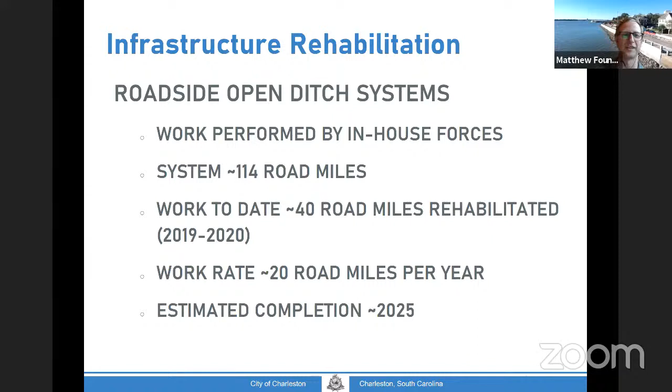The closed systems is sort of our... Mr. Chairman. Keith. Yes, sir, Mr. Councilman Shahid.

I just wanted to comment about what Matt's last comment was. We've been going around through the neighborhoods, and it's created a bit of a stir, frankly, Matt, and I may be calling on you for some remedial work we need to be doing with some of these neighborhoods. But I'm glad that we're doing this work, it really is important. But I think we need some constituent outreach, a bit more detail. I'll get back with you after the meeting and talk about it more. Sure, no, I'm happy to.

Generally, each neighborhood has on the order of 1 or 2 residents out of any 50 to 100 who are kind of unhappy because their particular property doesn't flood and they see the damage to the front ditch system until the grass revegetates. There is some frustration, but I think it's a really good place to be when you feel like your city is doing too much drainage maintenance rather than not enough, which is our typical complaint.

Yes, so you're right, it is a challenge, and it does look rough when you freshly trench ditches for the first 6 months or so, until the grass revegetates through the next growing season. I think we're a little less invasive than DOT tends to be, but it's still a pretty significant change when you leave for work in the morning and come home in the evening and see the difference. But we're certainly happy to reach out and talk to any residents about it.

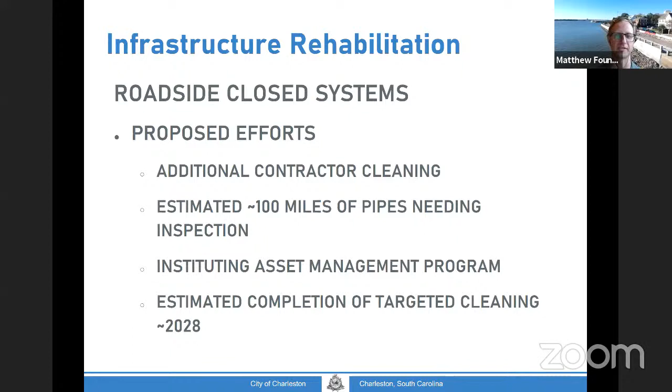We worked with the budget ad hoc committee last year to reallocate some positions within the department to create that inspection and asset manager inspection position. That position is getting started now, going through and trying to allocate priorities for pipe cleaning. We estimate getting through our targeted pipe cleaning work by 2028. So that's not the entire system this time, it's really targeting the major blockage areas within the peninsula and within the newer subdivisions again.

That really is just getting started in large part this year. We've done some selective cleaning over the last couple of years, especially on the east side, but this will be our first year with a major investment into that type of cleaning.

The other, kind of the third tripod of our ditch and pipe conveyance system, are the rear and side yard systems. These are hand cleaned generally, the ditches that run along the side of the home or behind the homes in much of West Ashley or James Island especially. These are, again, in-house forces, typically working with weed eaters, pole saws, and pitchforks, trying to hand clean these systems. We completed the hand clean level of rehabilitation over the 2019 to 2020 years for every one of these systems that we maintain in the city.

Some of the systems still don't work as well as we'd like because there's only so much you can realistically do with a shovel and pitchfork with any kind of realistic productivity. So we worked to obtain a walking excavator, a smaller, more flexible piece of equipment that can get into some of these ditches. That'll come in hopefully April to May this year, and be able to clean out some of the areas where we're still having challenges.

But it's much better than it used to be. We've rehabilitated all these, and we're currently cutting all of them once per year, doing a heavy vegetative cutback once per year. We're looking to get to, with the walking excavator over the next couple of years, being able to get every ditch maintained twice per year, so two heavy vegetative cutbacks through the growing seasons basically.

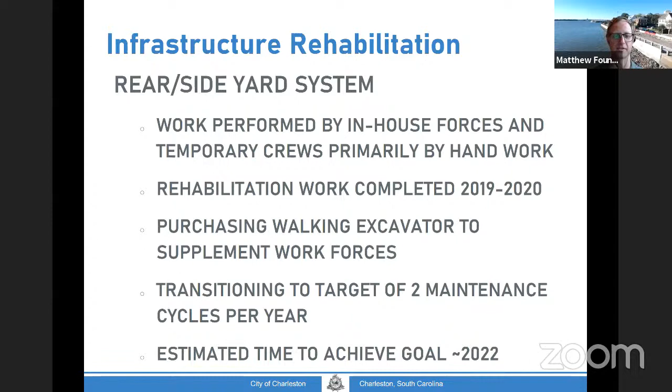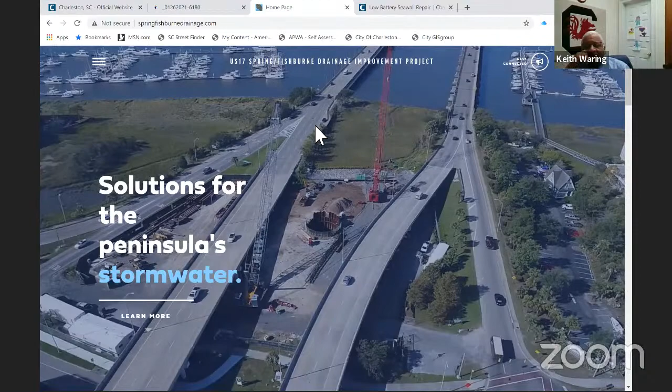Hey Matt, can you go back to that last shot please? Which one? The one that had all the rebar. Yeah, let's see, one second. You're just trying to test my Zoom capabilities now. Yeah, I am stretching you a little bit here. If you don't mind, can you just go back to this a little bit slower?

The parallel construction looks like it's going on - is this one just the... So this is what we call the outfall section. This is where we're digging out to put the eventual box culvert. There are 3 ten-foot by twelve-foot wide box culverts that will come in here and act as pipes to convey the water out into the river. This platform next to it is actually a temporary trestle built in the marsh for the cranes to operate on to do the work. It's about 1 million pounds of steel sitting in the river to do the work to install the outfall here.

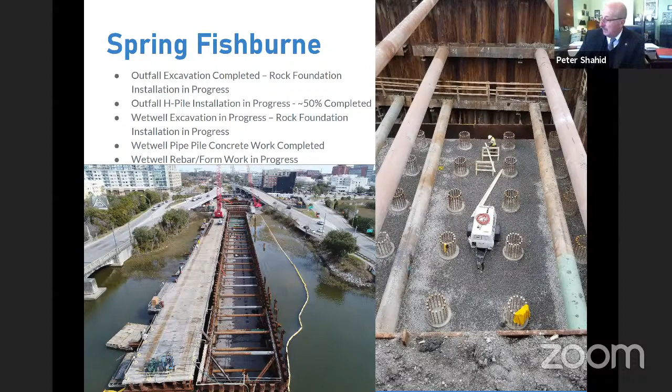I was just trying to get some more of the minute details of that, Matt. I think this is going to have such a huge impact on the peninsula once we complete even just this particular phase of the work. And then it looks like something out of the future to some degree when we get to full completion with the full project completed with full phase 5. So thanks for spending some time on that with us and explaining that in more detail. That's really quite interesting work we're doing here. Yeah, absolutely, and I'm going to show you briefly the website because I agree.

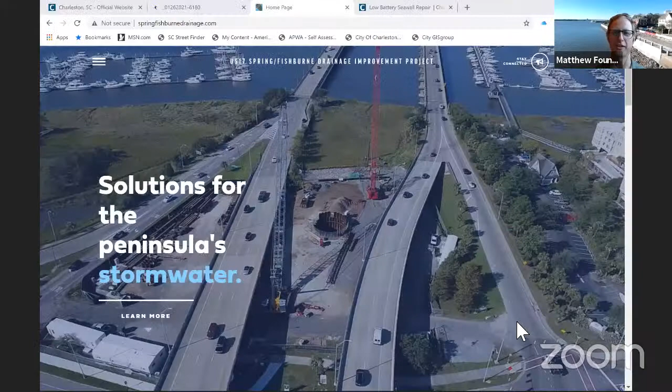It's confusing. It's hard to understand what's going on between the river. We actually get a lot of questions about whether we're building the West Ashley bike ped bridge because of the causeway that extends out for the cranes to operate on.

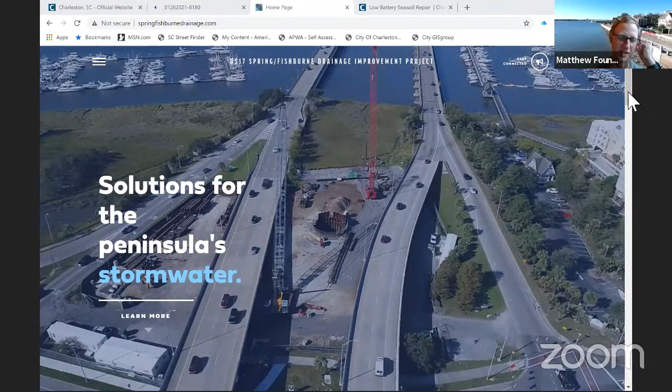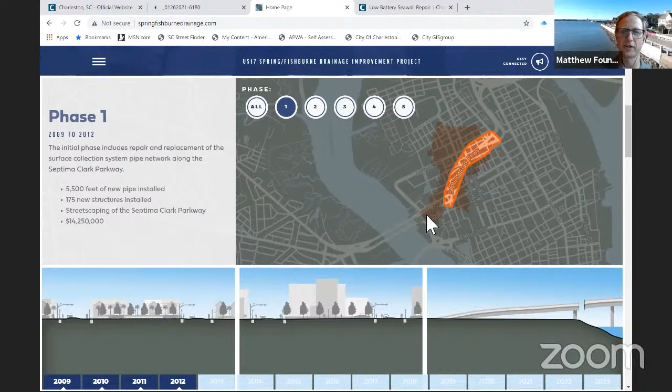But this is our kind of updated Spring Fishburne website. We've been trying to go through and start updating all of our project website work. It includes walking you through all the different phases. You can see this slightly subdued highlighting is the area of the peninsula that is actually improved for drainage by the project. So it's a huge chunk of the flooding areas in the peninsula.

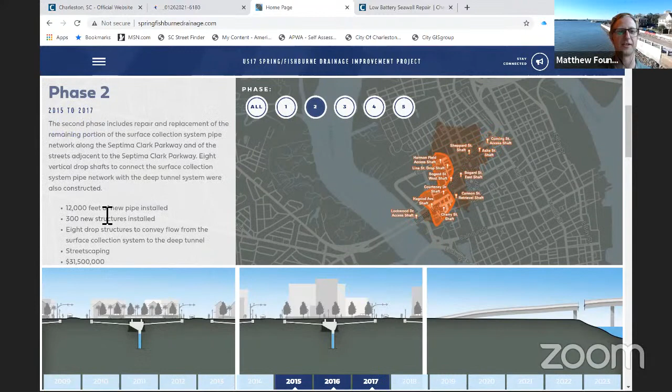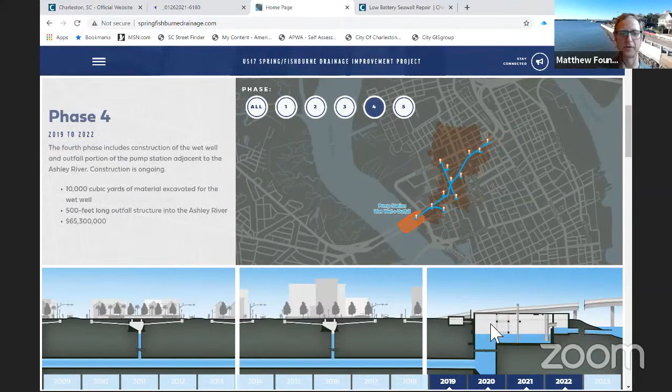Then it works through the phases. Phase 1 in bright orange is where phase 1 occurred, and what phase 1 was is on the left side of the screen. Then you get phase 2, phase 3. It shows on the bottom here what it looks like in profile and how everything starts to come together, with the years of when it was built. Phase 4, which we're building now, is the wet well coming in and being constructed in the outfall. And phase 5, which is what we were just discussing, is when you'll see eventually the pump station superstructure and the pumps go in. We have that kind of work through the information there.

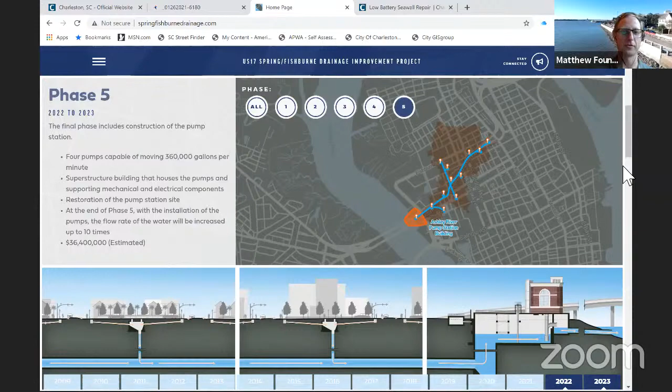It has some quick facts about how the project works. And as you were asking, Councilman Shahid, like how much improvement is there at low tide versus high tide in the different phases.

Some nice background pictures of what the deep tunnels look like and how they work. Some of the costs, how much money was going into local businesses and things during construction. And at the bottom, which is the fun part for the engineers at least, is all the pictures of all the cool stuff that was built during the project. We have some project videos showing different components, drone shots. There's a whole extensive gallery you can get into and really see the history of the project, because almost all of it is below ground, other than the traffic disruptions from the first couple of phases on US 17 and some of the beautification elements. So it's easy to not necessarily know what's been happening for the last 5 or 6 years, realistically, of heavy construction work. So it's something we're trying to get more information out there and help share that project knowledge.

That's wonderful, thank you, Matt. So let me jump quickly back to the slideshow. So the next project.

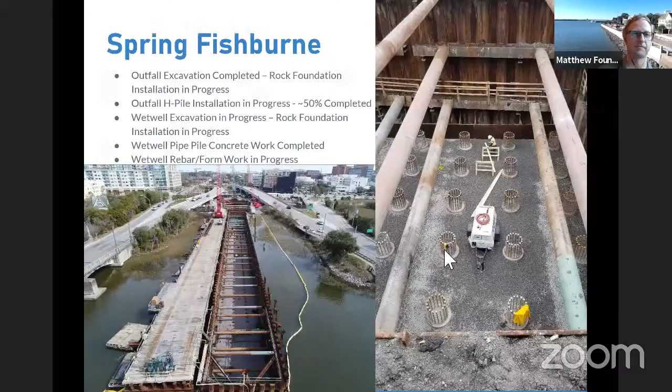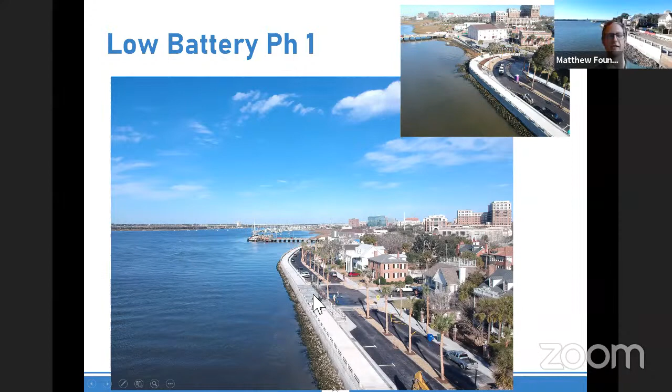You can see the new wall, the new veil wall, the riprap, all the new asphalt, new landscaping, and then the top corner is a detail of the curve of the wall here, which is one of the more complex elements. The little pocket park, both at the curve, and then there's another pocket park at the speed table here with bench seating and some other information there.

That one also, we have a pretty good project website, which we need to now update for the end of phase 1 and the beginning of phase 2. But if you're on our website, you can go in and see the new traffic control plan for phase 2. We've done handouts and flyers to impacted residents and met with a number of the community members and community groups to let them know what traffic control will look like and how the project will proceed.

Phase 2 will be getting underway with a little bit of setup this week, and then more major traffic control movements and things next week.

You can see some of the historic pictures and updates from the project here. There's some really neat things, like there's a brief time-lapse video. Let's see if we can get to work.

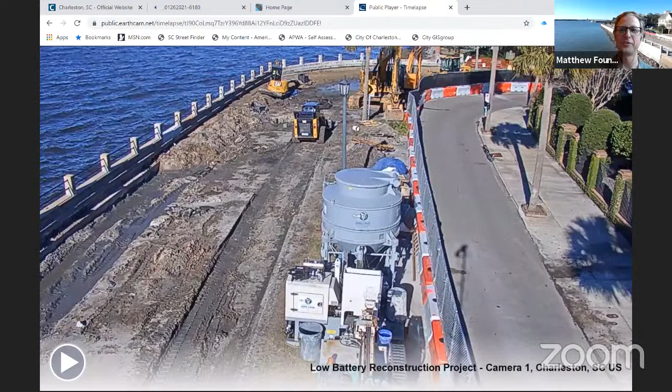I'm not responsible for the music choices on the time-lapse video, but I'm going to accelerate this because even on time-lapse, it's a long, complicated project.

You can kind of watch the project occur and see all the major work that went on, because again, it's a project where you see the beginning and the end, and it's sometimes hard to find all of what occurred during the project.

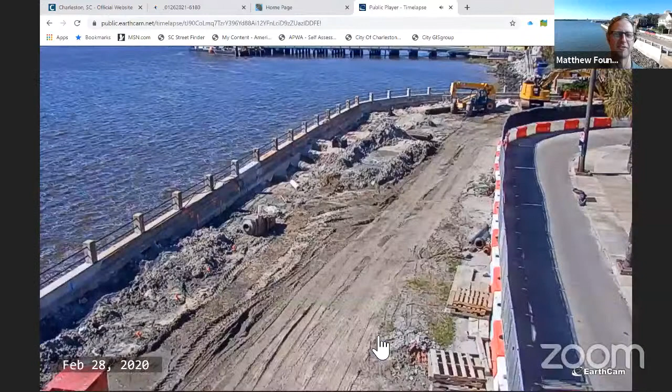In this case, you're seeing all the utility work going on with CWS, then you're seeing the contractor come back with gunite and basically install the foundation here, with the foundation moving through. If you're not getting sick and dizzy from watching the accelerated video...

You'll see now they're removing the old wall and reinstalling the new wall and platform, coming in with the pedestrian platform, building back as they come around the curve again, which is a really complex piece of concrete work there coming around the curve.

This only takes us up as they come back, install railing and the surface components of the wall, until where you can see the drainage pipe being lined up for all the new drainage installation that occurred on that project.

We're going to update that now to take us through the rest of the project with that drainage installation, as well as paving and surface restoration work. But it's a great looking project about to start on phase 2. So we're excited that's continuing to go really well.

All right, Councilman Griffin. Yes, sir.

Hey, you know, what I was thinking, Matt, is while you were going through all this stuff, and this is really, really great stuff. I feel like sometimes when we get to our council meetings and we've got so much stuff going on and we get to this part of it, it's so important, but it seems like we're always dog tired by the time we get to it.

How would you feel about us maybe doing a workshop to update us on these projects, like in between two meetings, where as a council member we could submit a project that we know the city's working on, and we could run through a bunch of different projects so that we could take that and relay it back to our district and kind of not feel like we're so overwhelmed or having to rush through it at council.

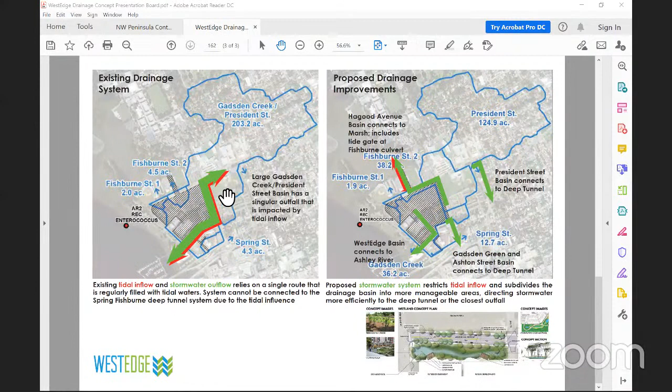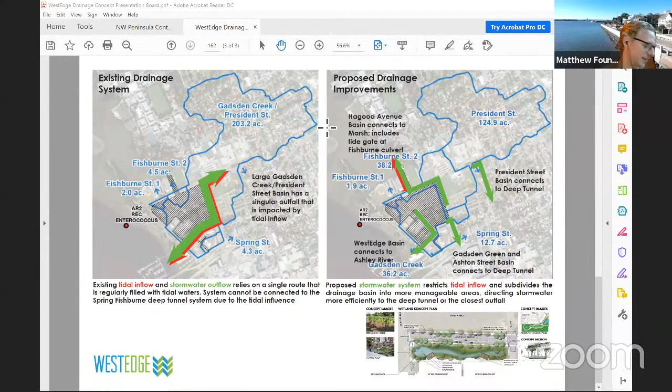Okay, good. I know Councilman Zachary had asked for, I think Councilman Gregory had originally asked some of the WestEdge questions, because I think it's something he certainly had a lot of interest in. Briefly, the section Councilman Zachary had been interested in, I believe, I don't know if he was able to make it, but some of his constituents may still be on the line.

Let me see if I can do this, even though it's the same. All right, did that switch over to the peninsular map? Not yet.

It just has that you've started screen sharing. Okay, this map is... there you go.

Yeah, this map is an enormous file because of all of the topo and pipe network. Councilman Zachary asked for an update on the rehabilitation work through his district and where it intersects with Councilman Gregory's district. I wanted to run through some of the heavy rehab we've done in the area.

This can get a little challenging to follow because it's such a complex pipe network, but this is Rutledge here. In yellow, you can see we did heavy drainage rehabilitation on Rutledge from Poplar down to Gordon through Simmons Street, cleaning out the pipe network, which was basically completely blocked, to get it closer to the outfall, both on Gordon and down on Grove Street.

There's a very large system on Grove Street. We previously cleaned out Grove Street and lined some box culvert, doing a series of work a number of years ago along Grove Street. I'm going to try to do these relatively quickly. On President Street, just south of the park - let's see if I can do this without freezing everyone's computer.

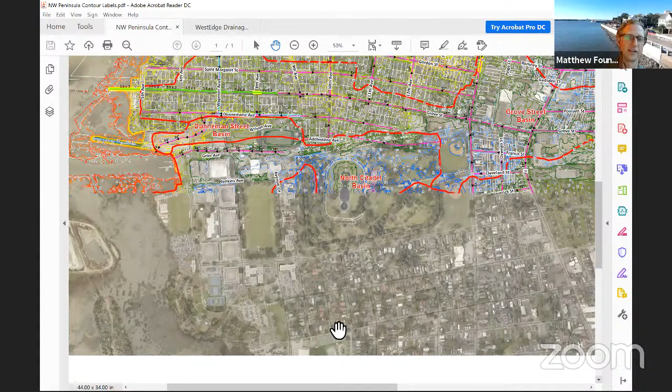On President Street, we cleaned from Moultrie to Congress. This was another block section that had some major failures. We were able to get this whole bowl area, which you can see in the topo, to start draining, and it comes down Congress and drains out through Congress.

We also cleaned President from Bogard down to Spring. This is one of the really challenging areas for drainage in the city, as you start getting south towards Septima Clark. We cleaned this section from Bogard down through 17th, probably not quite low enough. This will eventually be served by the Spring Fishburne project, but we're trying to find short-term relief since there's really challenging flooding through this area. So we went through and rehabilitated those pipes.

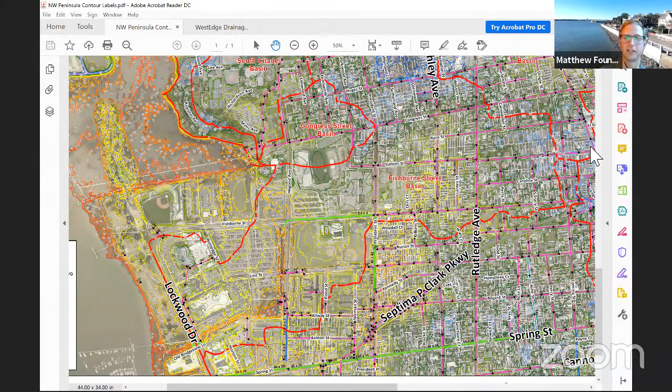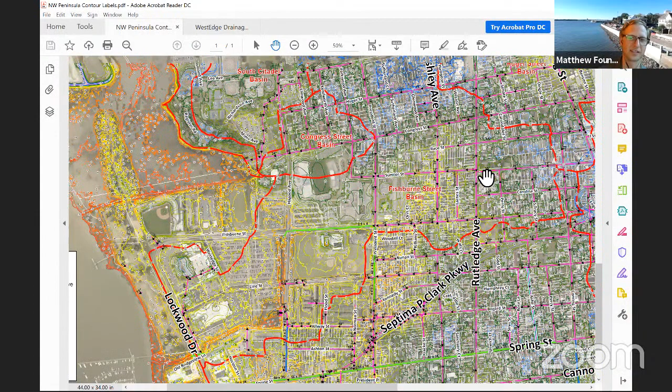We also cleaned and repaired pipe at the intersection of Grove and Rutledge. There are some parking lots in this area, if you're familiar, that are almost always underwater. We basically got that to drain well now by fixing the damaged sections of Grove, which has been a great improvement from a standing water perspective.

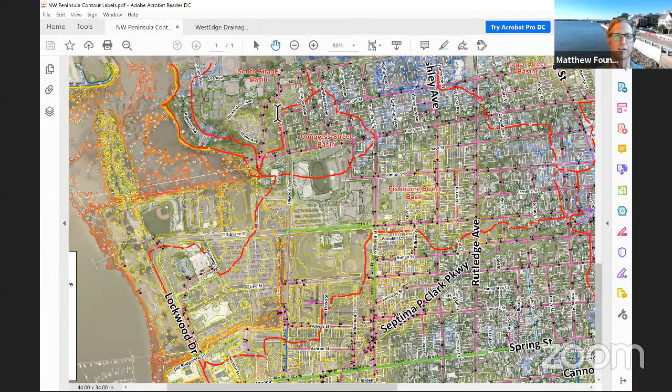We also repaired and cleaned Gordon at the Wagener area, where, as you move in this direction, we found some collapses. We were able to clean that out so it flows out into the river. This is what we've done over the last year in this district from a heavy maintenance perspective.

Piedmont and Maple - again, another area that tends to have standing water long after and during rain events. We started out cleaning Piedmont and Maple down Maple Street, then came down Hester, which connects to Alberta, then to 10th, which eventually gets into the water. We got all of that cleaned and in really nice condition.

We had a lot of improvement along Hester in the 10th Avenue Basin, but we didn't see much improvement at Piedmont and Maple, which surprised us. We realized the drainage system here isn't as well connected as we thought, and a lot of the Piedmont water is actually coming north all the way up to Peachtree and coming out there. So we went back and cleaned the Piedmont through Peachtree section, improving drainage for much of this area as well.

Piedmont Avenue always had a flooding issue going back into the 60s - part of that is a low-lying area. It is, yes, absolutely. There are parts that are like a valley that dips down in there. Yes, you can see.

It's hard to see on this map since it's zoomed out so far, but the intersection here is mostly at about 6 feet of elevation, and the surrounding areas are mostly at 9 and 10 feet. So this whole section basically drains down into that bowl, which is why we're trying to address it. It's not perfect, but it now will at least drain out as the tide comes down instead of just sitting for a couple of days. But you're right, many of these neighborhoods are quite challenging.

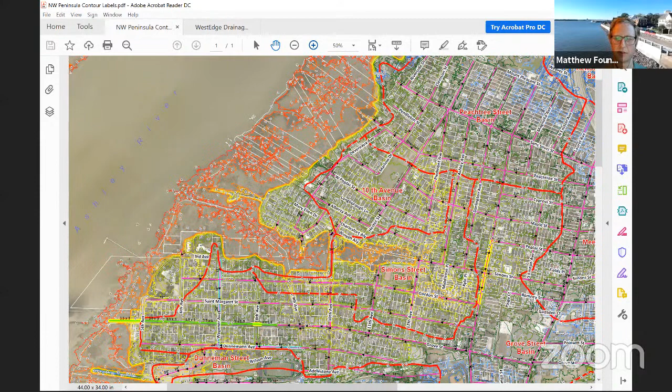And then the last one in this area was... Oh, before you leave that - what's that open area right below Marlow Drive? Is that a park, or a marsh? No, I believe that's a small park - Hester Street playground. Okay, yeah, thank you, Mayor.

Thanks. Spend many hours out there.

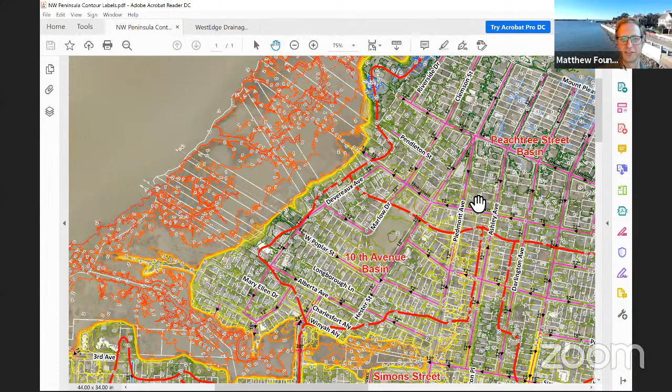The other area we cleaned and rehabilitated was the North Enston Sans Souci area. This was another section, actually higher in elevation, but was flooding really badly. We cleaned down Sans Souci to King Street and got that to drain again better despite the high elevation. We were surprised how badly it was flooding, but we got it mostly opened up and drained down towards King Street. The only other section in Councilman Sakran's district we focused on previously was the almost 2 miles of pipe cleaning we did recently in Cooper Jackson, going through that whole subdivision trying to clean out the major blockages and challenges we saw there.

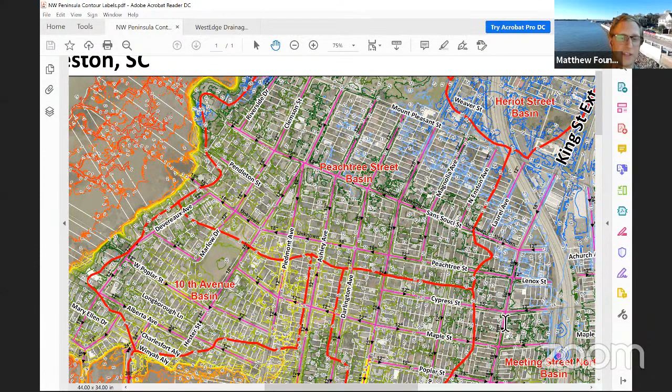That was my whirlwind tour through some of our Western Peninsula cleaning.

It's a lot of work. All right, Mr. Fountain, I'm telling you, that is a lot. A whole lot. Any questions from committee members?

I see Council Lady Jackson's on. You have any questions as we wrap up, Councilwoman? No, thank you. I'll just be taking notes from my colleagues, Gregorie and Sakran, because I know they really did want to hear all about the details.

And Matt, I'm amazed at your memory and recall of maps of places, streets, tunnels. I'm sure he'll run through this again tomorrow, right? He lives and breathes this stuff. Y'all kidding me?

We will, but anyway, maybe we can summarize some of the ones we're more familiar with. Mr. Mayor, I just wanted to ask Matt - maybe they don't really look through what they clean out, but is it mostly silt? Is it a lot of organic debris like leaves and limbs?

It depends what area you're in, Mayor. Different pipe materials and different habitats lead to different issues. In this section, the Wagener Terrace section, we see a lot of tree root intrusion because you have a lot of vitrified clay pipe and a lot of really beautiful live oak trees. The oak roots will basically go in and block the pipe, and once they're in there, it acts to make like a grid in the pipe. Then all the leaves and anything else that get in there get caught by the roots, and it just makes a complete solid plug very, very quickly.